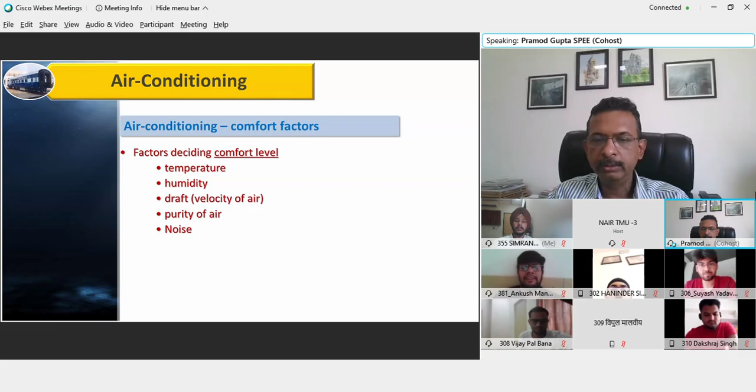There are 2 important criteria which decide the comfort level for the passenger. The first one is the humidity, to be precise, relative humidity. And the second one is the temperature. If we have the right combination of relative humidity and temperature in an AC coach, passengers will feel comfortable. Any mismatch or imbalance in these 2 factors will cause a lot of complaints from passengers.

To make the concept more clear, I have mentioned the basic definitions of absolute humidity and relative humidity. Absolute humidity is the mass of water vapor divided by the mass of dry air, giving us the absolute humidity at a given temperature. Absolute humidity is expressed as gram per meter cube.

Hotter the air is, the more water it contains. This is the first principle when we design the air-conditioned environment. When the air is hot, the amount of water vapor already present in the air is less, and therefore we can add more water to it. We can saturate it further. So in case the outside temperature is high, we can presume that the water content is less in the air.

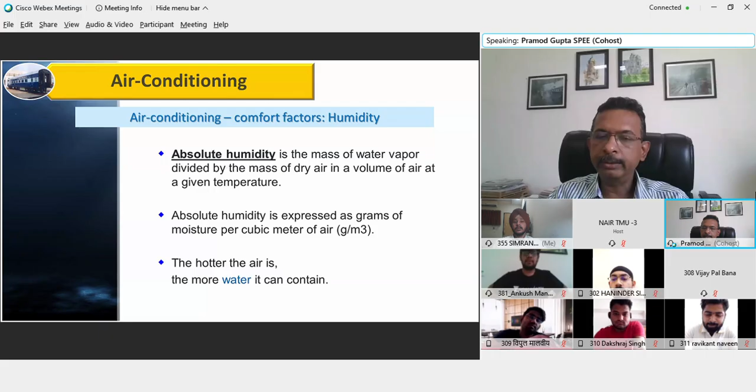The factor which is important for air conditioning is relative humidity. It is nothing but a ratio, a unitless ratio, which is the ratio of current absolute humidity to the highest possible absolute humidity in the environment, and it depends on the current air temperature. 100% relative humidity means air is totally saturated with water vapor and no more water can be accommodated. When we arrive at such a situation, the relative humidity becomes 100%.

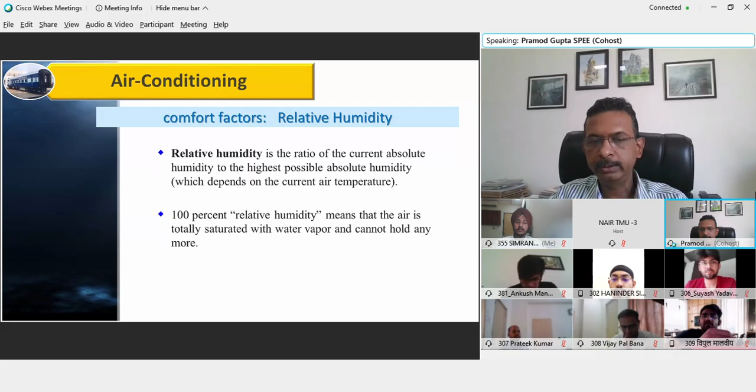Why is relative humidity important for an AC coach? I'm trying to explain using 2 examples. If the relative humidity is low, we feel much cooler than the actual temperature because our sweat evaporates easily, cooling us off. This is the basic phenomenon which takes place.

Suppose the air temperature is 24 degrees Celsius and the relative humidity is 0%. Then the air temperature...

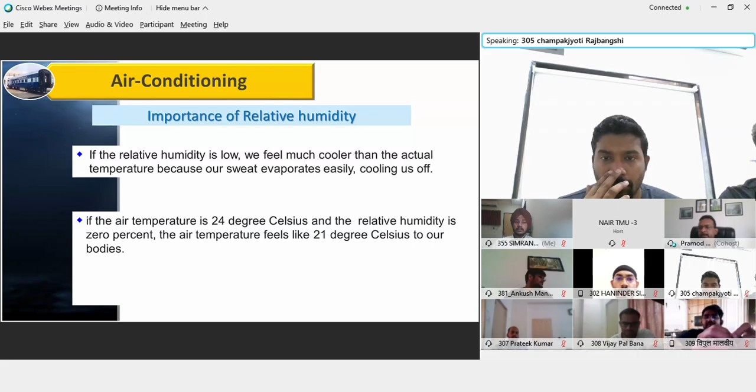Thank you. So where were we here? So if the air temperature is say 24 degrees Celsius and relative humidity is 0%, then our body feels as if the air temperature is 21 degrees centigrade. On the other side, if the air temperature is the same at 24 degrees centigrade and the relative humidity is 100%, then we feel as if the temperature in the environment is 27 degrees centigrade.

So just by manipulating the relative humidity in a coach, we can change the perception of the passengers traveling with us. There are 2 ways of controlling it: we control the relative humidity and we also control the temperature, and we try to make a balance between these 2 vital parameters to provide a comfortable environment in a coach.

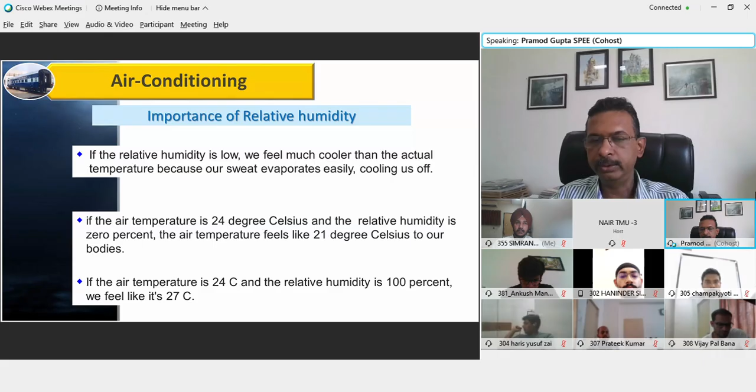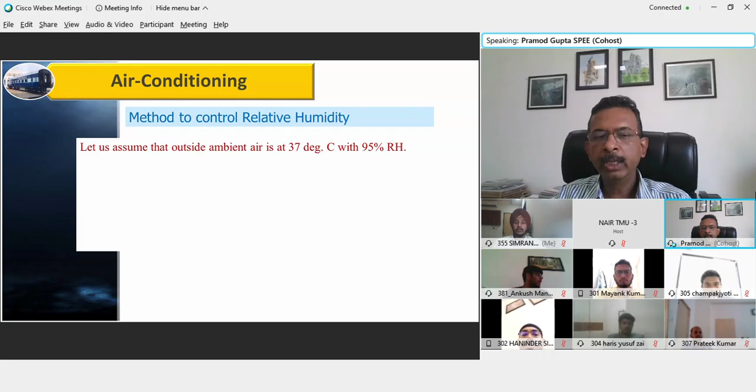Now this is the overall system, how relative humidity is controlled by any air conditioning system. It may be a stationary air conditioning system, or an air conditioning system that we have in a moving train. Suppose the outside ambient air is 37 degrees centigrade with 95% relative humidity. If that is the condition in which an AC coach is supposed to travel, we send this air over an evaporator at 4 degrees centigrade.

When we reduce the temperature from 37 degrees centigrade to 4 degrees centigrade, the capacity to hold water gets reduced. As I have already told, hotter the air, more water can be accommodated in the air. The moment I reduce the temperature, the capacity to hold water also gets reduced, and the excess water comes out of the air in the form of moisture, which can be removed from the entire system. Once I have removed the overall water content from the air, we again raise the temperature.

When we raise the temperature, the relative humidity again becomes lower, and now the overall air has less moisture compared to what it had at 37 degrees centigrade. This is a hypothetical example where from 37 degrees centigrade with 95% relative humidity, I have brought it to 21 degrees centigrade with 50% relative humidity. This cycle keeps repeating to ensure the relative humidity remains under control.

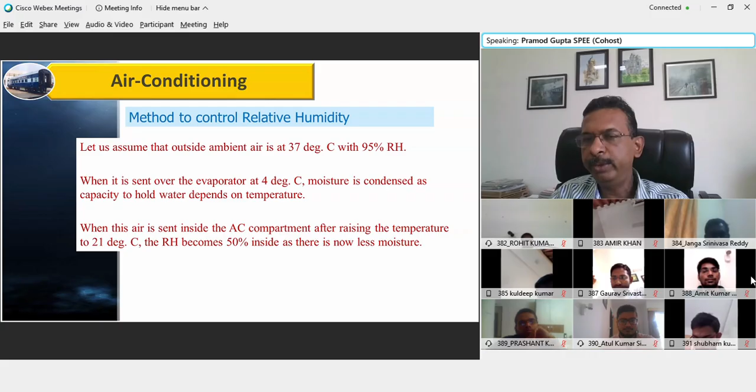As per the design issued by RDSO, the maximum permissible relative humidity in an AC coach is 60%. It cannot go beyond 60%, because most human beings feel uncomfortable if the moisture level or relative humidity goes beyond 60%.

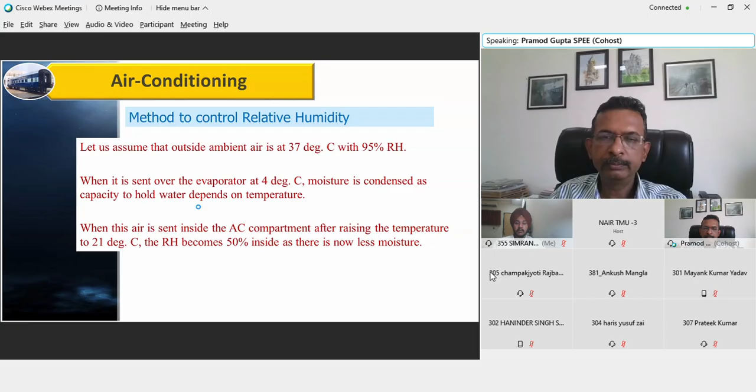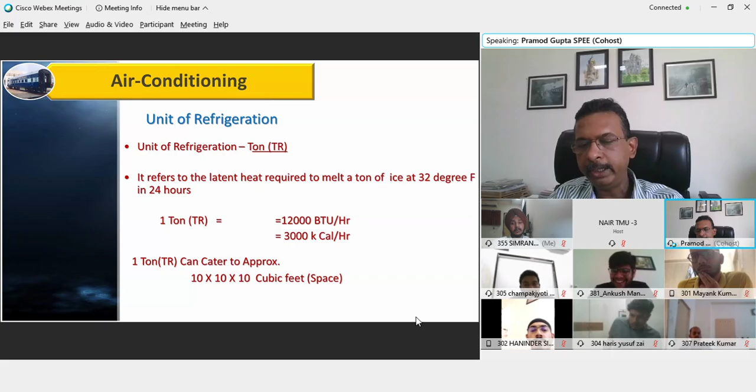The unit of refrigeration, all of us know about it, so I will quickly go through it. One ton of refrigeration is equivalent to 3000 kilocalories per hour. Whenever we want to calculate the capacity of a system, we use this empirical formula: one ton will be required to cool and keep an area of 10 by 10 by 10 cubic feet at the comfort level. So whenever electrical power people design a system, they use this formula to decide the total tonnage required for the AC equipment.

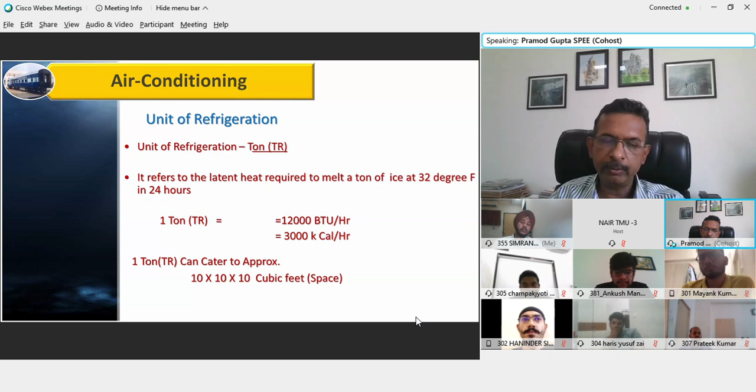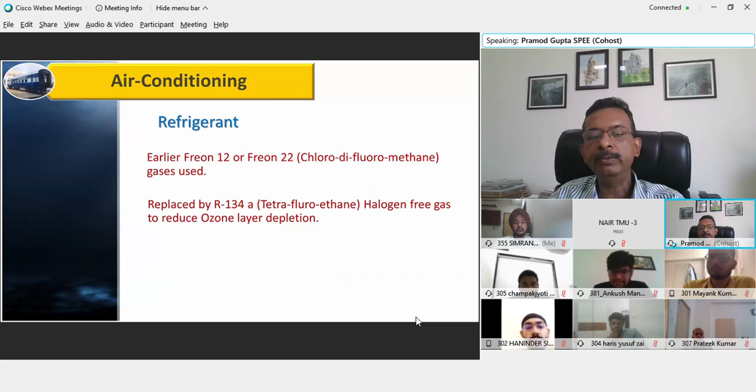When we started air conditioning in AC coaches, we started with Freon 12. When production of Freon 12 stopped due to environmental concerns, we moved on to Freon 22. Later, Freon 22 was also banned, from sale in the open market, and supply to railways was also stopped. So we moved on from Freon 22 to R134A, which is a halogen-free gas and does not affect the ozone layer. This is an environmentally friendly refrigerant gas, now used in AC coaches all over India.

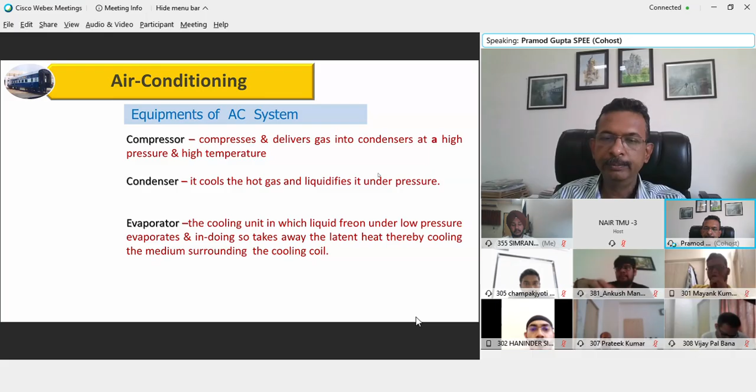When we see the refrigeration cycle, the condenser is the component that cools the hot gas and liquefies it under pressure. The evaporator is a unit in which liquid freon under low pressure evaporates, and in evaporating, it takes away the latent heat available in the air, thereby cooling the medium surrounding the cooling coil. So the principle of air conditioning, which I explained earlier, is performed by these three different components provided in an AC coach. This is the entire refrigeration cycle that we see in the coach.

Another important component in the AC coach is the expansion valve. The expansion valve controls and regulates the rate of flow of liquid freon under high pressure, depending upon the requirement of switching the AC plant on and off, and depending upon the temperature variation that has to be maintained. The amount of refrigerant is controlled by the expansion valve, and only the appropriate amount is allowed to pass or circulate in the system.

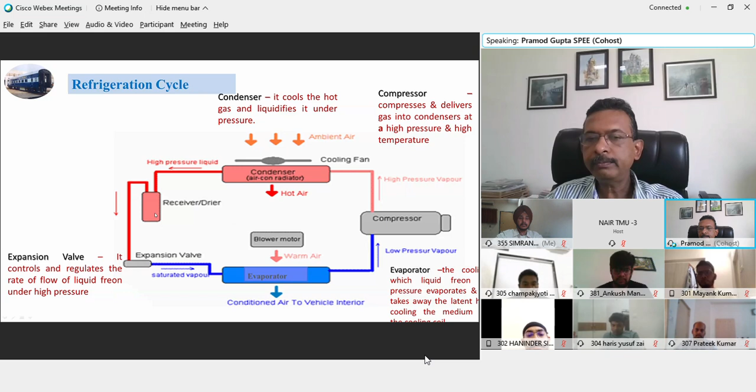There were many issues when we started the air conditioning, and the number of failures was also high. The first and foremost requirement is very high reliability standards. When passengers are traveling, we have no other source of air conditioning the coach if there is a failure in the air conditioning plants. Since the AC coaches are sealed, we don't allow outside air to flow into the coach. In case the air conditioners are not working, it will be unbearable for the passengers.

So reliability is very important. The AC plants are supposed to remain in working condition throughout the journey. The journey may be more than a day's journey. There are long distance trains which run for more than 36 to 38 hours to reach the destinations. So it is important that the reliability is very good.

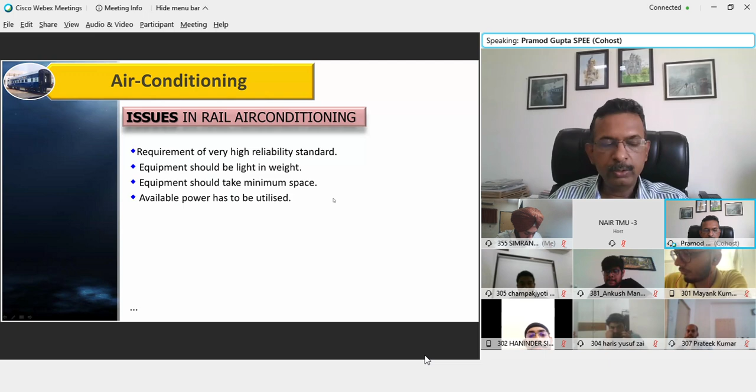Secondly, the equipment should be light in weight because any additional weight is going to add to the tare weight of the coach. The equipment should take minimum space because if I want more space for air conditioned equipment, I shall have to compromise on the space available for the passengers. Therefore, we have to design the equipment optimally, considering the overall efficiency of the system, so that we can fit all the equipment into the bare minimum space available in a coach.

The available power being generated by the DG set or by the self-generating coach has to be utilized. So the air conditioned equipment should be designed in such a manner that it should not require any other type of voltage or current.

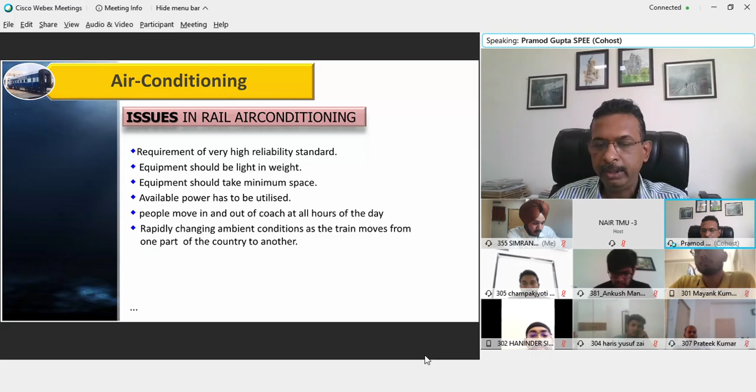The fifth important design criteria is that we have no control on the passengers regarding their movement in and out of the coach during the entire journey. Many people keep moving in and out, and many stand at the door even after opening it so they can talk to people and enjoy the cool air in the coach. All such movement in and out amounts to excess leakage of the air conditioned air. Whenever there is leakage, the temperature becomes high and the load on the air conditioning equipment also becomes very high. So whenever we design a system for an air conditioned coach, a certain percentage of leakage is taken into account because of the continuous movement of people in and out of the coach.

The rapidly changing ambient conditions also make the working of air conditioners difficult. During the winter season, we have extreme cold conditions in the north, where the temperature can be 0 degrees or below 0 degrees centigrade, with relative humidity very near 100%.

The moment the train moves from the northern part of the country to the southern part, where weather conditions are good, we have to switch the air conditioned plant into cooling mode. Whereas during the same journey, when the train was moving in the northern part of the country, we had to switch on the heating arrangement of the AC plant. So with changing ambient conditions as per the geography and territory in which the train is moving, the requirement of conditioning the air keeps on changing, and the plant should be able to take care of it without manual intervention.

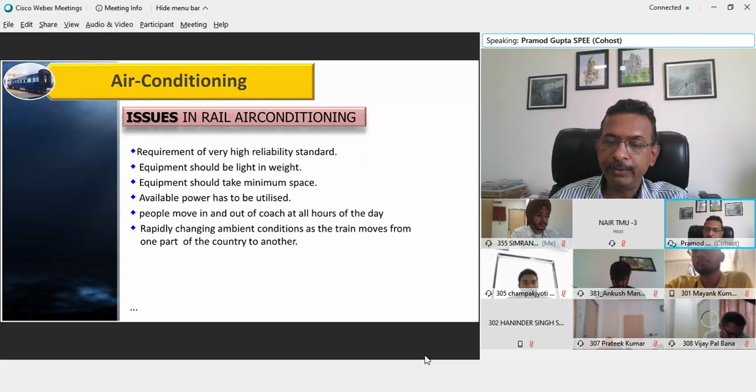Excessive vibrations are another issue creating problems. Initially when air conditioners were designed, they were designed for stationary equipment, because the components in an air conditioned unit are connected using copper tubes which are brazed to each other. Vibration makes life complicated for these copper tubes and brazing joints, because it may cause cracks to develop in the pipeline. As a result, the refrigerant gas may escape into the air and the AC plant may stop working.

The dusty atmosphere impairs the exchange of heat from the AC plant to the environment. If all the equipment is dusty, the heat exchange will be low and the efficiency of the AC plant will also be low.

The safety of passengers is also important, because the AC equipment works at 400 volts, and the rules and regulations of the Indian Electricity Act are also applicable on air conditioned coaches. We have to design the system so that people don't come in contact with live wires and don't get electrical shocks, and we also have to ensure the air conditioned equipment does not catch fire during a run. All safety related norms that are supposed to be maintained are maintained by the maintenance staff during maintenance of coaches in the coaching depot.

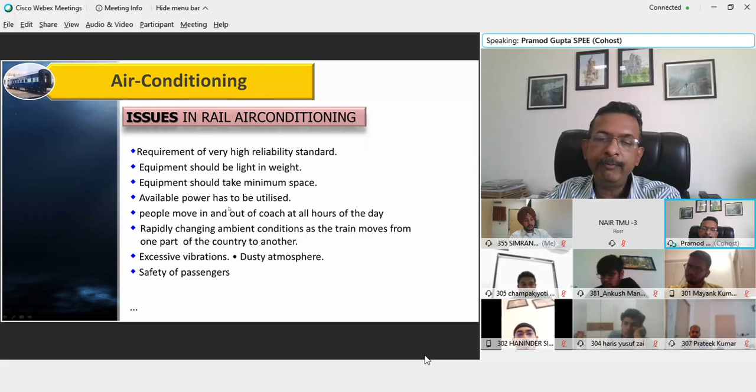So these are some of the important issues which we face when we design the air conditioned equipment for the coach and when we maintain the coaches in the coaching depots.

These are the design parameters, which I have picked up from the RDSO manual: to supply clean, fresh air at a controlled, uniform temperature.

We have to cater to the continuously changing number of passengers. There is a possibility that only 2 or 5 people are traveling in a coach, and there is also a possibility that the coach is overcrowded, which happens during the festival season and summer break, when more than the permissible number of passengers, along with heavy baggage and luggage, travel in AC coaches. So the air conditioned plant should be designed to take care of these extreme situations as well, along with heating and cooling, as I have already explained.

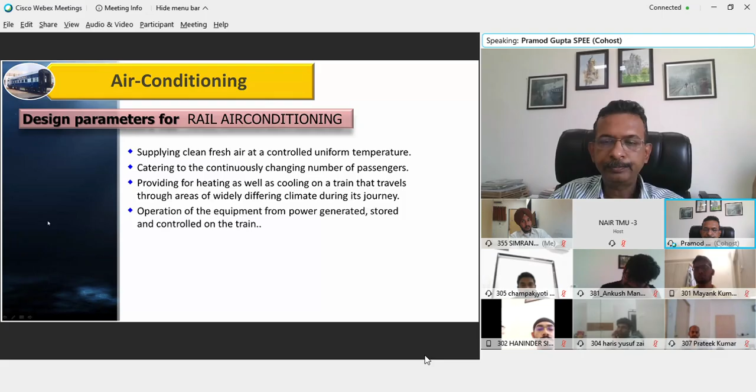These are the different temperature settings which we have provided in the coach. Earlier there were 3 different settings, and we could change them as per the requirement or request of the passengers traveling in the coach. Entertaining these requests was creating a lot of problems for the staff, and when technology improved and we found the most comfortable range for passengers, we decided to do away with the 3 ranges and go ahead with a single range of temperature settings in the AC coach.

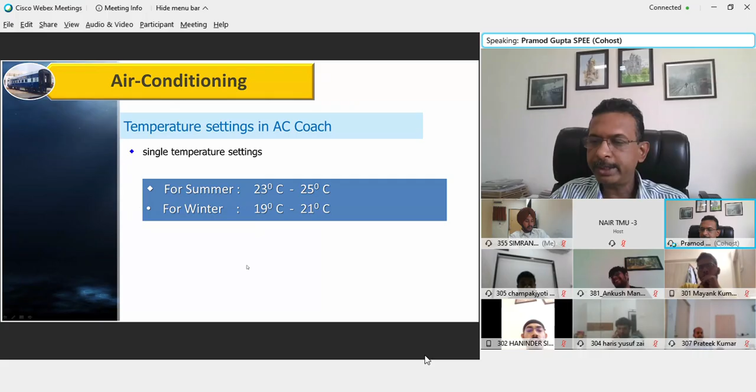During the summer, the temperature is set between 23 to 25 degrees, and for winter, it is between 19 to 21 degrees centigrade.

We have a cut-in and cut-out kind of arrangement which maintains the temperature within these specified ranges. The temperature settings are also displayed in the AC coach to keep passengers informed and to reduce passenger complaints.

This was not done earlier. We were not very open about the temperature provided in the coach, and passengers used to complain that the cooling or heating was not adequate, and a lot of unpleasant situations were created in the past because of heated discussions between the AC coach attendant and the passengers.

In order to avoid passenger complaints and to make things more transparent, we have started providing these stickers on both sides of the coaches, on the AC coach panel itself, so that passengers are now aware of what to expect. In case there is any requirement beyond this range, it is not possible to entertain their request.

Number of complaints have reduced, although we still encounter some passengers who complain that these temperature ranges are not comfortable to them. There are passengers who insist that during summer, the temperature should be kept as low as 19 degrees centigrade. We receive all kinds of requests, but it is not possible to entertain them because we have to maintain a temperature comfortable to most passengers. These settings have been worked out after doing some study.

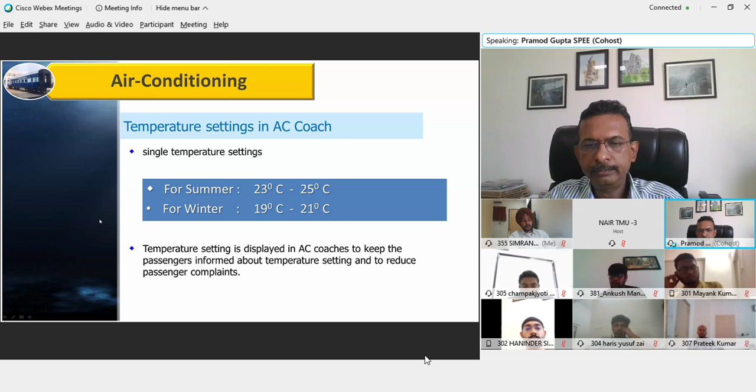Depending upon the number of passengers traveling in the AC coach, the requirement of AC load is calculated, and according to that, the capacity of AC plants is decided. We do the calculation first, arrive at the total AC load considering change in weather, leakage of air conditioned air, and other parameters, and arrive at the optimal requirement for AC load of the coach, assuming the entire coach is full. So we design it considering that every seat is occupied.

In AC first class, the requirement is 5.3 ton, and we have provided only one plant with a capacity of 6.7 ton. In AC2 tier, the requirement is 7.48 ton, and we have provided two plants, each with a capacity of 5.2 ton. So, in case even one plant is not working, I am left with the capacity of 5.2 ton, and with that I have to take care of the AC load requirement of 7.48 ton.

There are situations when one AC plant is not in working condition. In that case, half of the capacity is not there, and the entire coach is attempted to be kept in an air conditioned environment using a single plant. Under these circumstances, the AC coach attendant becomes very careful. He tries to control the movement of passengers and remains alert that excess passengers should not travel in the coach. He takes certain written and unwritten measures to ensure there is no passenger complaint and the coach can work up to the destination.

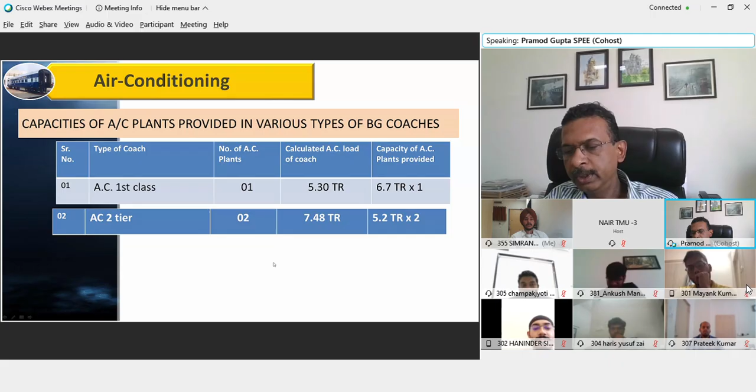Is it similar to regular AC coach? Yes, it is similar to the regular AC coach. The Palace on Wheels train is maintained by Ajmer Workshop. The Maharaja train, which is operated by IRCTC, is also maintained by the Ajmer Workshop. Ajmer Workshop is the nodal agency for maintaining the AC plant for Palace on Wheels.

I have done the maintenance on Palace on Wheels for 2 years when I was posted as a Deputy CWE at Ajmer Workshop, during the years 2004 to 2006.

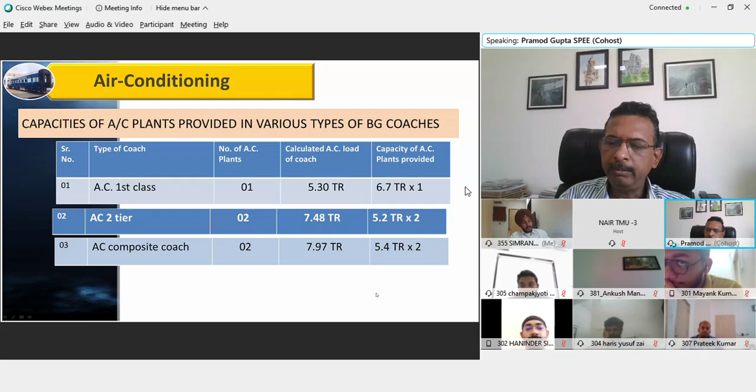The AC composite coach has 2 plants of 5.4 ton capacity each. Also, regarding Palace on Wheels, let me share one more piece of information: there is no railway employee who accompanies the train. It is managed by the Rajasthan Tourism Department, and even the tickets are issued by them. They only do the ticket checking in case it is required, although it's a premium train.

As on date, as per the prevailing rate, the per passenger ticket for one night is somewhere around 1 lakh rupees per person. That is the rate for the ticket per person per night, and they also take care of all the hospitality and everything. They only allow one supervisor to accompany the train, with strict instructions that the supervisor or staff cannot move in the coaches at their own will. Only if allowed to move in an AC coach, he comes to see the working of the AC; otherwise, he remains at the designated place in the train itself.

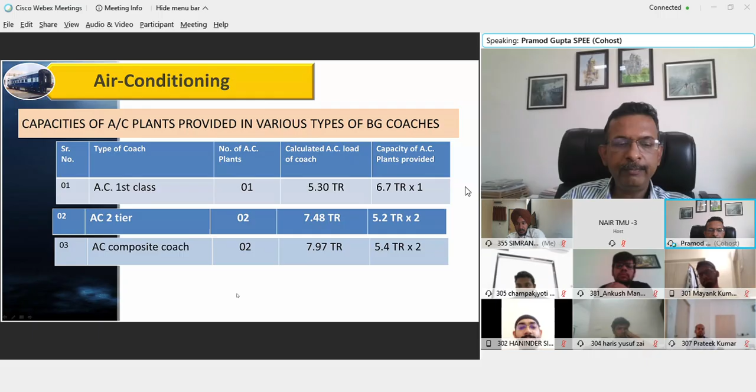The AC composite coach has more passengers, so the requirement is more, and the capacity of the plant is also high. We have the highest requirement in AC 3 tier, and accordingly the capacity of the plant is also high. So these are the different requirements of AC coaches and their capacities in the AC coach.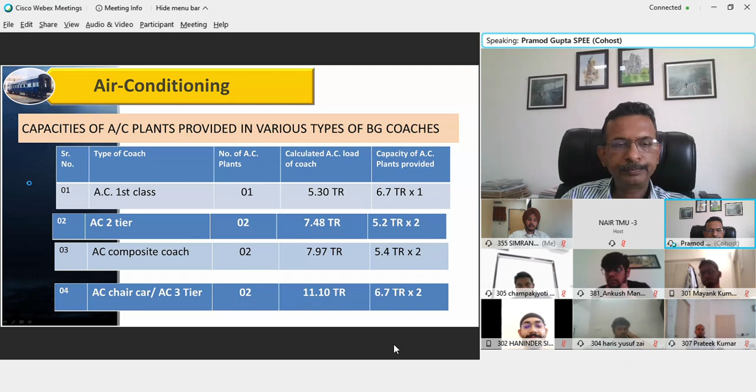There are two systems for the generation of air conditioning requirement into the coach. The first one is the self-generating AC coach, and the other one is the EOG AC coach. So we have two different modes of generation of electricity for smooth operation of the AC plant in an AC coach.

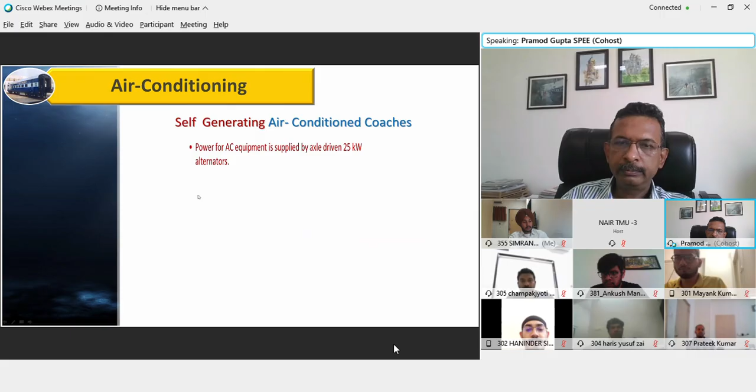The self-generating air conditioned coach is similar to what we have seen in the train lighting coach. The only difference is that the ratings of the equipment are different, and the size of the equipment is different. The power required in a self-generating AC coach is provided by a 25 kilowatt alternator, connected through the axle pulley. At low speed and halts, the power requirement is met using a 110 volt lead acid battery, mounted in the underframe of the coach. So these are the two arrangements through which we provide electricity to the AC plant.

The other one is the EOG kind of arrangement. I explained a little bit about DG sets and power cars when we took the session on train lighting equipment. The output supply is 750 volt three phase, which comes from the power car, and this is fed to the coach using one of the feeders. The AC equipment operates at 415 volt three phase, so we have to provide a 150 kVA transformer in each coach to step down the voltage from 750 volt to 415 volt. Then the lights and fans operate at a different voltage.

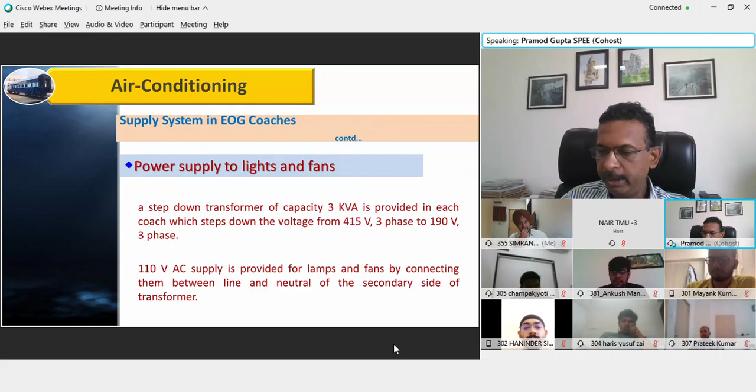Lights and fans operate at 110 volt single phase, so I need another transformer. The capacity of this transformer is 3 kVA. We do a second stage of stepping down the voltage, from 415 volt to 190 volt three phase, and we connect the lamps and fans between one of the lines and the neutral, so as to achieve 110 volt AC supply required for lights and fans. So there are two levels of stepping down the voltage made available from the power car.

We have another provision only for lighting the emergency lights. We have one battery provided in the coach, connected to a few emergency lights, which becomes operational only during emergency. The emergency mostly occurs when the coach gets derailed. Suppose one coach is derailed, and if it's an EOG kind of arrangement, the entire couplers get disconnected, so we have no source of supply for the air conditioning equipment and train lighting equipment for the coach.

The other option can be that the coach is derailed and stationary. If it's a self-generating coach, there is no generation from the alternator because the wheel is not moving. And even if the battery gets disconnected from the circuit, the battery backup is also not there for the regular supply, leave alone the plant - we don't even have the regular power supply for train lights and fans.

During such a situation, the battery takes over. It has sufficient capacity - 24 volt, 90 ampere hour - and this battery is used to provide emergency lights so that the coach does not become dark, and it remains active till the rescue operation starts. So this is the only function for which the battery is provided, to supply emergency lights in the coaches.

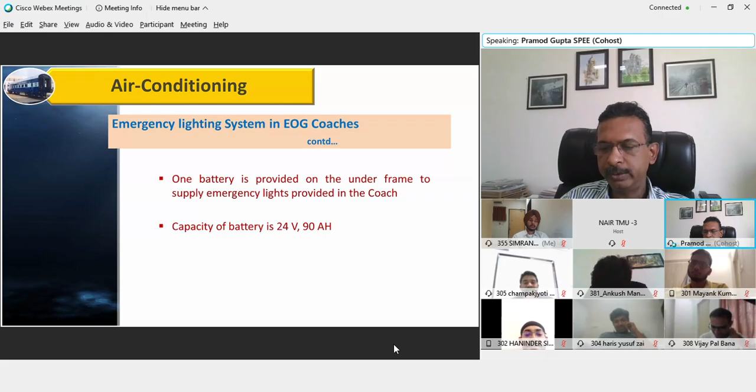There is a requirement as per the guidelines that... Gautam, please mute your mic.

There is a requirement that before we allow passengers to board the train, the AC coach should be air conditioned. Now I have two or three different methods to air condition the coach. The first one is that I can use the stored energy in the battery if it's a self-generating coach. It is the worst kind of idea to consume the stored battery energy, because that stored energy is meant to take care of emergencies or the power requirement during halt. So if I consume that energy, there may be a problem during the run.

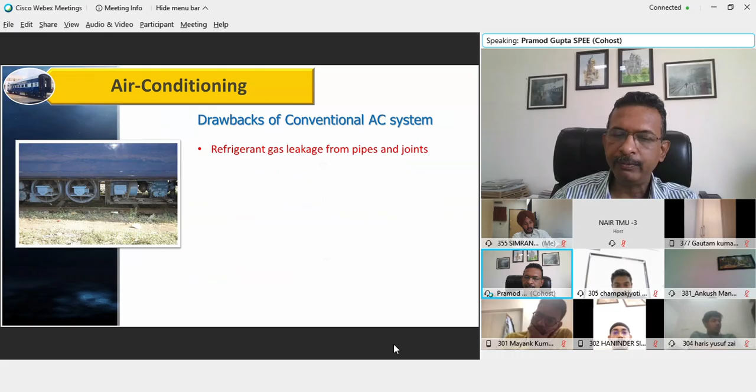There is a possibility that an external body, some ballast or foreign object, may touch or hit the refrigerant gas system and develop cracks, leading to leakage of the refrigerant gas.

The second disadvantage was the high weight of the AC equipment, contributing to the overall coach tare weight. Then there's large space occupation, as you can see in this photograph of one plant, and a similar situation here - the entire space is occupied by the AC plant.

There is a maintenance problem for the underslung equipment. Suppose the rake is placed at the platform, and the staff accompanying it finds a small problem affecting the overall efficiency of the coach that could be attended to - he cannot do it because he cannot access the air conditioning plant by going under the coach. There is no space for him to go under, and it is highly unsafe to allow staff to work in such a risky environment. Thirdly, he can neither sit nor stand under the coach, so practically he cannot do any work. So even if the trouble is identified and manageable before departure, we allow the train to run with that small trouble left unattended.

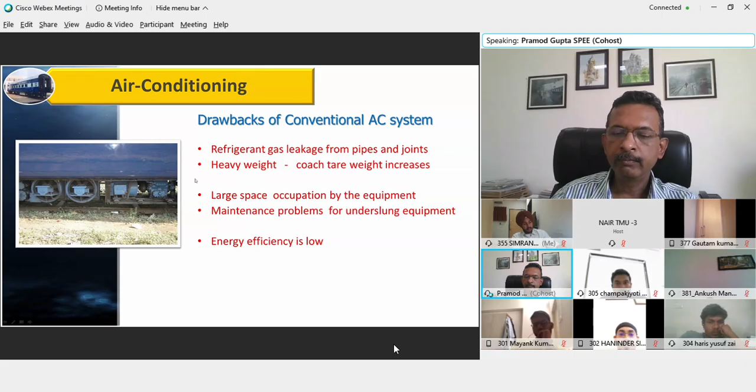So these are some of the disadvantages that we had in the conventional AC coach. In case I ask a question in the exam about the advantages of RMPU coach or the disadvantages of conventional AC coach, your answer will be on similar lines. You have to write on the similar line.

In case I ask for the refrigeration cycle, you should be able to draw it. In case I ask you to mention the function of the components, you only have to write the name of the equipment and its function — you need not draw the refrigeration cycle. So read the questions carefully and answer accordingly, whatever question comes for you in the exam we are going to have next Friday.

Did I explain the overall structure of the question paper to this group? Can somebody say? No, sir. No. Okay, I think I have explained it to the earlier group.

The exam will be for 35 minutes as usual for the other subjects. There will be questions of 20 marks in the objective part — approximately 20 marks — with multiple choice questions, yes/no type questions, and a few fill in the blanks type questions.

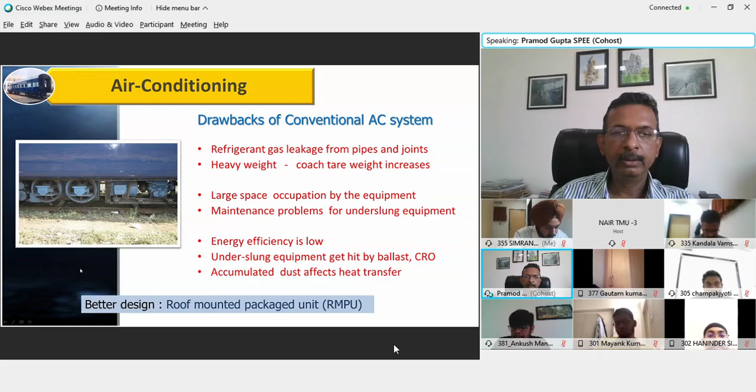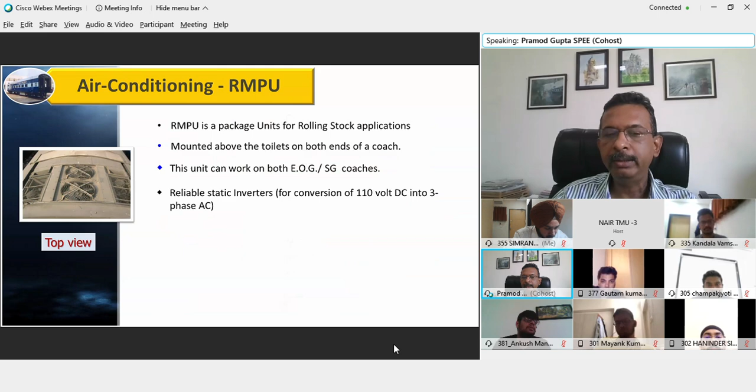Let's come back to the subject. We have moved from the underslung AC coach to the RMPU type of AC coach. It was designed in 1992 especially for the rolling stock purpose, and it is mounted above the toilet on both ends of the coach. It can work on EOG and SG, and we are using reliable static inverters for conversion of 110 volt DC into three-phase AC.

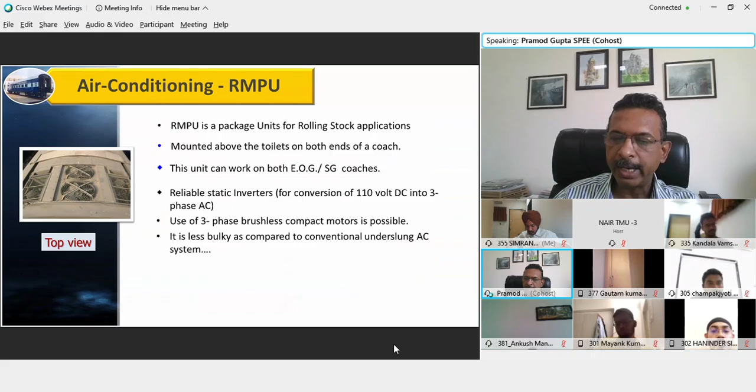We use a three-phase brushless compact motor. It is less bulky as compared to the conventional AC coach.

Initially, when we introduced the RMPU, it was 5.2 ton capacity, which was considered inadequate for the AC2 tier system, because when we designed these RMPU units, we somehow undercalculated the leakage of air which can take place due to movement of the passenger. That was a parameter which was not taken into account properly, because it was not anticipated that the movement could be as high as it was. So there were some complaints in the coaches, and it was considered not adequate. We revised the specification, and later on the capacity was enhanced. Now these are the different capacities which are being made available in the AC coaches.

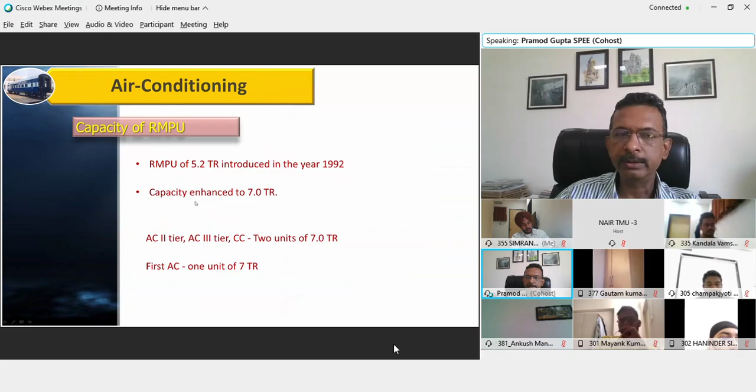This is how the RMPU unit looks like. We have the condenser fan and the condenser motors, then the sealed compressor. Each plant has two sealed compressors, and as I said, each sealed compressor works independently. We have the thermostat, which is provided in the return air path, and we also have the heating element. These are some of the photographs which show you the inside of the RMPU unit.

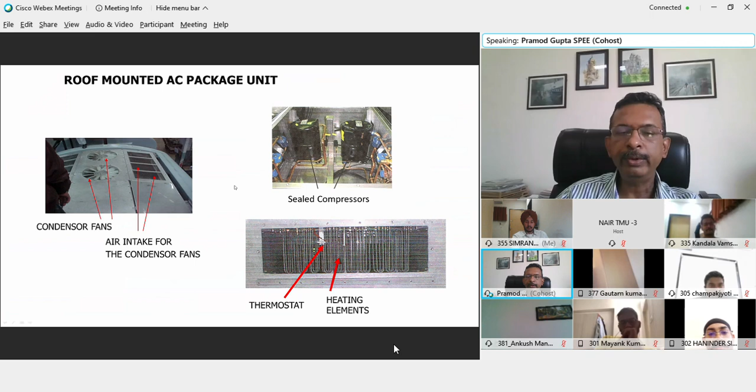This is a requirement as per the specifications. In the first AC coach, the requirement is that we should have the fresh air inside the coach at the rate of 0.7 meter cube per minute per passenger. Another requirement is that we should have two independent circuits, and each independent circuit should be able to work independently. So we have two compressors, two condensers, and two cooling coil cum heaters.

Each RMPU should be able to work with one condenser fan and cooling capacity so as to obtain not less than 75% of the rated capacity. This is the requirement, and the designs are approved only after these parameters and other parameters are met by the manufacturer of the RMPU unit.

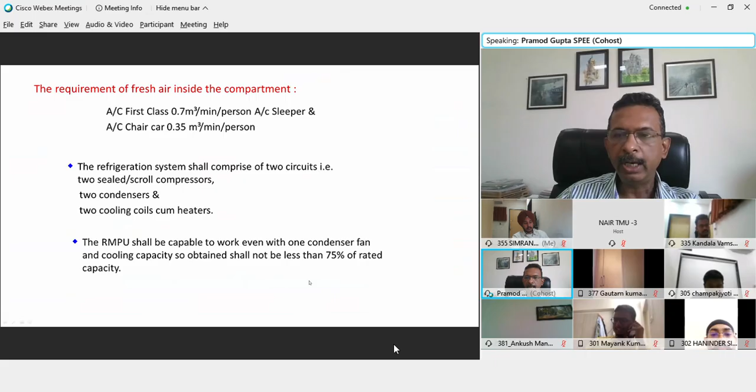This is a comparison just for a quick glance. You can see the weight is much less as compared to conventional AC. The amount of refrigerant which has to be charged is also less. I need only 3 kg of refrigerant gas as compared to 15 kg in the conventional AC.

The downtime for repair is also less. We simply remove the entire RMPU unit and replace it by providing a new RMPU unit, whereas in case something is wrong in the conventional AC equipment, I have to remove only one component: unbrace the copper tubing, remove the equipment, provide the equipment, and rebrace the pipeline.

Then carry out the test to check whether there is any leakage in the system or not. That test itself takes more than 4 hours because we charge it at a particular pressure, and after a certain period of time, we check what is the pressure in the pipeline. So repairing the conventional AC system is much more complicated as compared to the RMPU, which is an enclosed kind of system, a plug-in plug-out kind of system. In case there is any problem in the RMPU unit, we simply remove the entire RMPU unit using the crane and replace it with healthy equipment. Then later on, we carry out the repair work on the RMPU, which is available now on the shop floor.

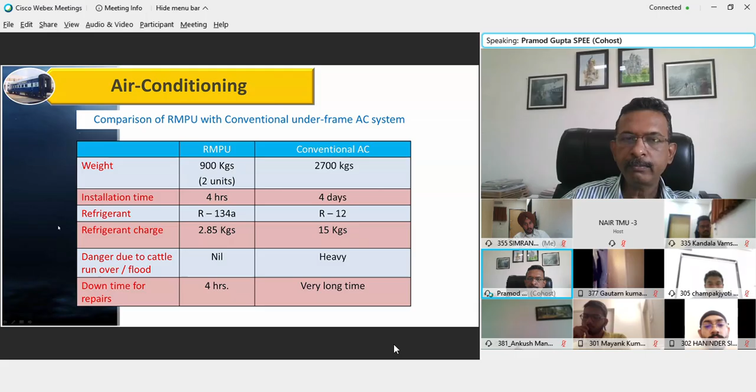The battery capacities are also different depending upon the type of the coach and the requirement. AC 2-tier, 3-tier, and composite coaches have an 800 ampere battery, while AC first class has one set of 525 ampere hour.

Now we will move on to the loco. I will explain some of the portion related to maintenance of electric locomotive. We will cover some slides today, and the balance leftover slides we will take in the subsequent classes.

This is the organization structure that we have for the electric locomotive. At headquarter level, we have PCEE and his team. And in loco sheds, we have senior D loco shed, senior DEE traction, rolling stock DEE, and ADEE. So this is the organization structure up to the division level, up to the zonal level.

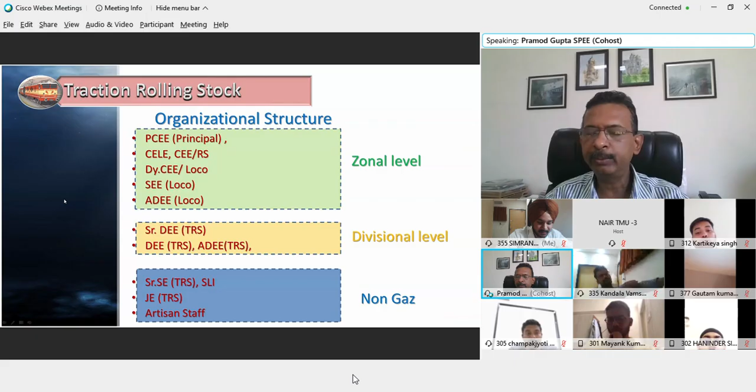Here are certain advantages of electric traction. We can utilize electricity, which can be generated from a variety of sources. It can be a fossil fuel generating system, or it can be a renewable source of energy. There is no pollution at site, although there is pollution when we generate electricity using coal.

Coal-based thermal plants produce harmful greenhouse gases, and in India, 70% of the energy we generate is being produced using coal-based power plants. Now we have decided, because people have become more environment conscious, and we also have commitments at international forums, that we should try to reduce the use of coal-based power plants. As a policy, it has been decided that no new coal-based power plants will be commissioned in India in future.

We have faster acceleration and braking, resulting in better running time. This is because of the design and the control mechanism available to the pilot, so he can accelerate the train fast as a large amount of energy can be pumped into the traction system, and braking is also smooth. Then we have reduced dependence on petroleum products because we are not using high-speed diesel.

There is a reduced noise level because the operation is smooth, and we don't have DG sets. High speed of the train is possible because the overall capacity, or overall horsepower, or the tractive effort available in an electric locomotive, is more.

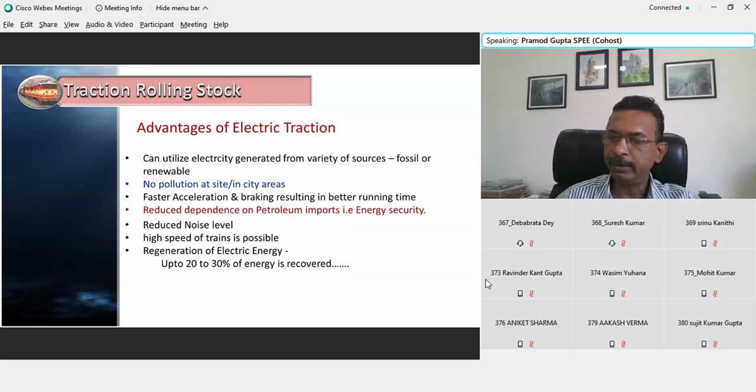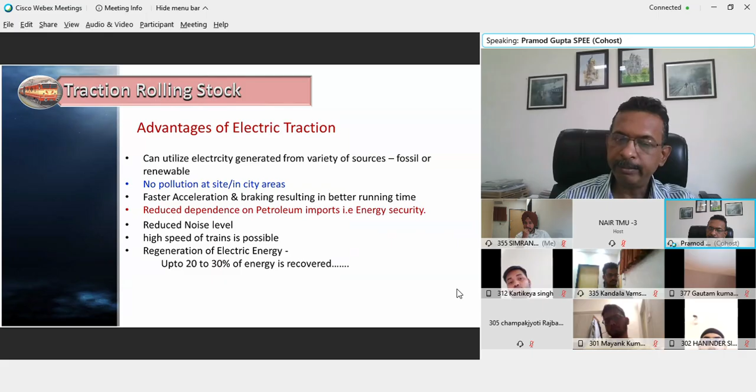The produced electricity, since it is not required for the locomotive, can be used by another electric locomotive in the same feeding zone, or it can be returned back to the distribution company. We have a net metering arrangement with the distribution company, and we pay the bill for the net amount of energy consumed in Indian Railway. So rather than wasting energy as friction or heat when brake binding takes place between the brake block and the wheel, we convert that energy into usable energy, returning it back and saving on electricity.

We have a large number of locomotives in service, and in order to identify each locomotive easily by everyone across the railway, we assign a unique number so that it can be traced and it is easy to communicate about. We have a 10-digit alphanumeric series which identifies the locomotive uniquely to everybody in railways.

The first letter indicates the gauge for which the loco is designed. If it is W, it is broad gauge. The second letter indicates the traction type. If it is A, it is AC traction; if it is D, it is diesel traction; if it is C, it is DC traction, or we have dual traction, AC-DC. The third letter is the type of service for which the loco is designed. If primarily designed for passenger service, it is P; if for goods, it is G.

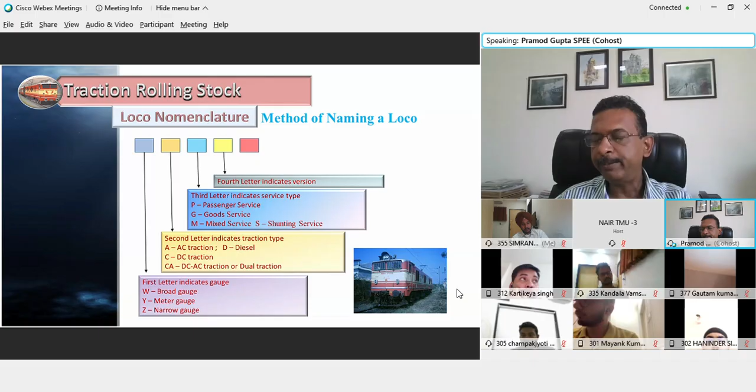The fourth letter indicates the version or type of technology used to design the locomotive. The fifth letter indicates the modification. Suppose I'm using the same technology, and within that technology I carry out a major change where a new version is not warranted, then I indicate it by the fifth letter.

If we see it like the operating system on a computer, the fourth letter is like having Windows 8 and Windows 10 - that corresponds to the fourth letter for the electric locomotive. If I have Windows 8.1, then Windows 8.2, the operating system remained version 8, but there were major modifications, which is why 8.1 and 8.2 were released. Similarly, for the locomotive, if we keep the overall architecture, control system, and traction system intact, but still carry out a major modification, we assign a different number.

For example, earlier we were using TAO kind of traction motors. Later, Hitachi developed a superior DC traction motor, so we replaced the TAO traction motor with Hitachi motors. The rest of the loco remained as it is, so the overall design and capacity did not change. We did not introduce a new version, but assigned a fifth letter, and those locos were identified with the letter H, meaning these locomotives have Hitachi motors provided in them.

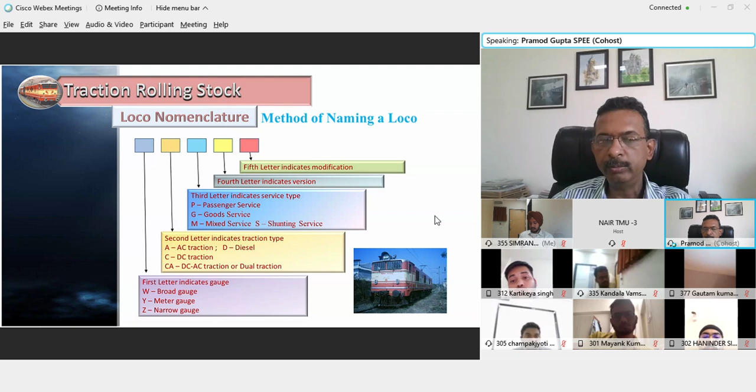For example, this is how a loco is named. WAP5 means broad gauge passenger service. WCAM2 means broad gauge dual mode loco, mixed service, version 2. WAG9 means broad gauge locomotive designed for AC traction and goods service, version 9. This is how a loco is named, and either these 4 or 5 digits are followed by another unique 5-digit number. If we combine all these numbers with the balance 5 digits, we can identify a loco uniquely.

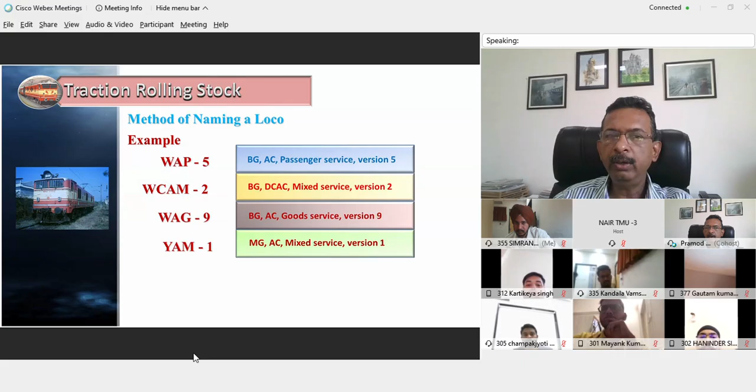We started importing locomotives from 1954 itself. The first 4 locos were imported from outside because we did not have any manufacturing capacity. CLW started production in 1961 when the first WCM5 locomotive was manufactured. We continuously improved the technology because when we started production, we received technology from both English Electric and Hitachi. We took the best features of both and introduced a new type of locomotive, starting with the WCM5. We Indians are very good at jugaad technology, so we could improvise the existing technology, do some jugaad, and come out with a new version of locomotive.

Later on, there was a requirement to have a locomotive which could work in both AC territory and DC territory, because the Mumbai area and Kolkata area were DC territories.

They were still having 1500 volt DC system, whereas the adjoining divisions started having electrification with 25 kV AC system. So in case I want to start a train in Mumbai and take it to Delhi, I need a locomotive which can work in both DC territory as well as AC territory. So we came out with another locomotive known as AC/DC locomotive, and these were the 3 important landmark locomotives which we came out with.

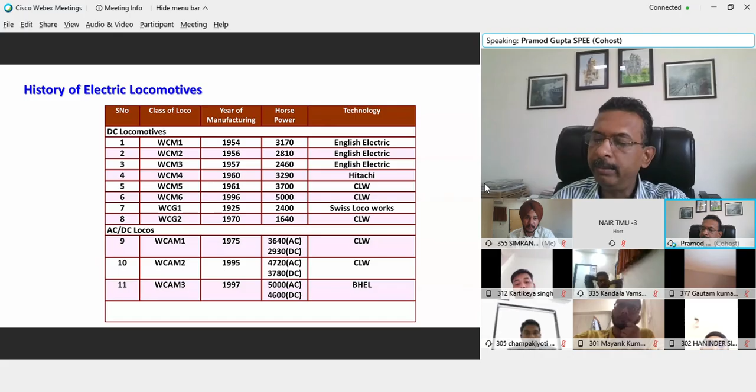The production capacity of CLW was less than the pace at which electrification was taking place, so CLW could not meet the expectation of the electrical department. So we roped in BHEL, the PSU of Government of India, and they developed the manufacturing unit and started manufacturing electric locomotives at Bhopal and Jhansi units of BHEL. They are still manufacturing locomotives for us, and they are one of the largest suppliers for components, especially traction motors which are still being manufactured by BHEL, and bogies are also being manufactured. So BHEL is continuing with the railway division in their organization.

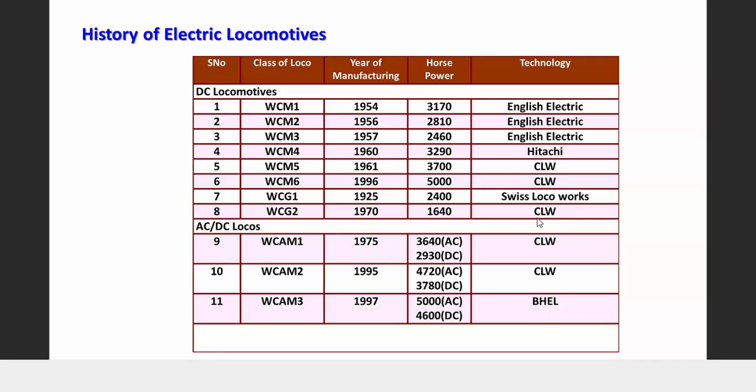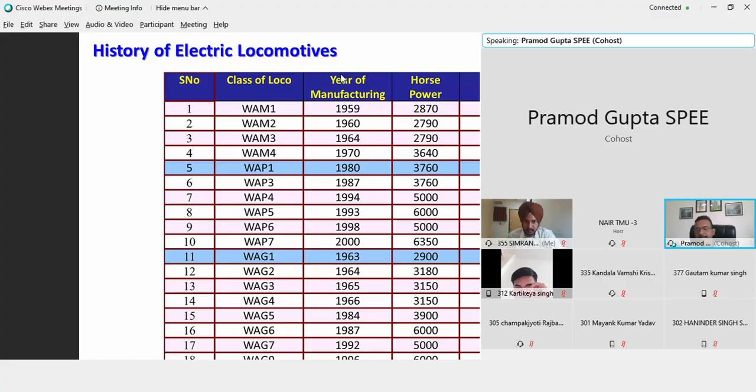Later on, we had a large number of locomotives introduced in Indian Railway. You can imagine the plight of officers posted in the loco sheds who are supposed to maintain so many types of locomotives. Although all locomotives are not based at all loco sheds, out of these 19, each loco shed will have at least 3 or 4 types of locomotives, and they have to keep their spares independently because the technologies are different, the requirements are different. The staff should also know the designs for each and every locomotive. Therefore, training becomes very important and we have to train our staff at regular intervals.

We had different locomotives, and the emphasis was to improve the horsepower. As we released a new locomotive, the common feature you can see in this table is that the newer locomotive had a better horsepower compared to the previous one. Like from WAM1 to WAM4, each locomotive, as we released a new version, was more powerful compared to the previous locomotive. Similarly, in the WAP series, WAG series, till WAG9, these are the manufacturer or the technology which has been taken under the transfer of technology we had with the original designer or manufacturer.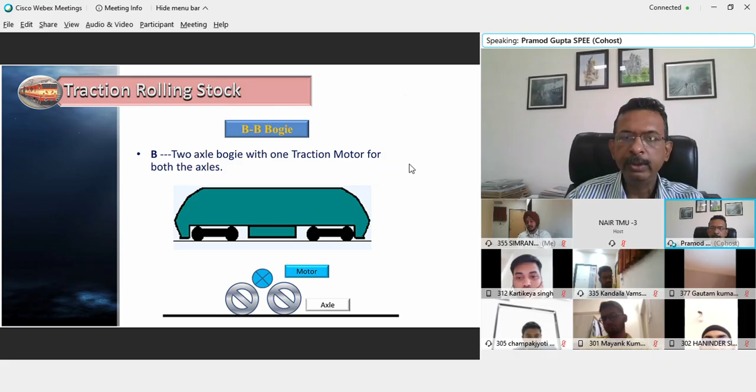Similar to the loco, we also have the bogie nomenclature. We have different designs of bogies provided in a locomotive. If we have a BB kind of bogie design, each bogie has 2 axles, and we have only one traction motor to drive both axles. So in this locomotive, we will have 4 axles and only 2 traction motors to drive the locomotive. The other design is the BO kind of system where we have 4 axles, and each axle will have 1 traction motor for its use.

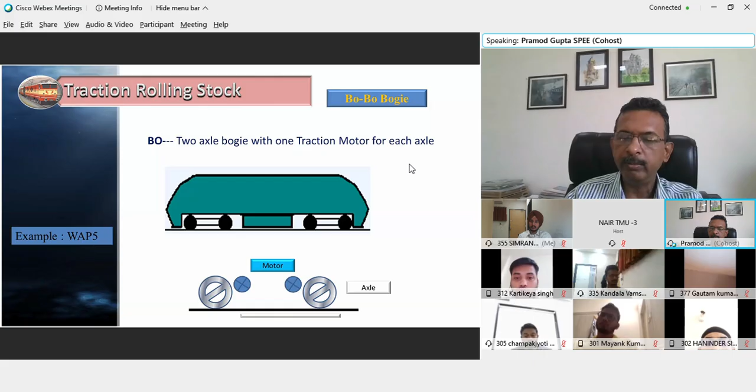The current example is WAP5. There is no other locomotive which is using BO kind of an arrangement. The locos which were having BO kind of arrangement have already been condemned and removed from service. So WAP5 is the only locomotive using this kind of bogie.

The most common bogie that we have on Indian Railway in electrical locomotives is the CO kind of bogie, where we have 6 traction motors and 6 axles. Each traction motor drives the axle independently.

It is possible for me to isolate one traction motor at a time. And even if one traction motor is isolated during run by the loco pilot, there is no loss of efficiency in the locomotive. There is no need to reduce the speed of the locomotive, and the journey can be performed. So if there is a need to isolate the traction motor, the loco pilot can easily isolate it using some of the rotary switches provided in the loco cab itself.

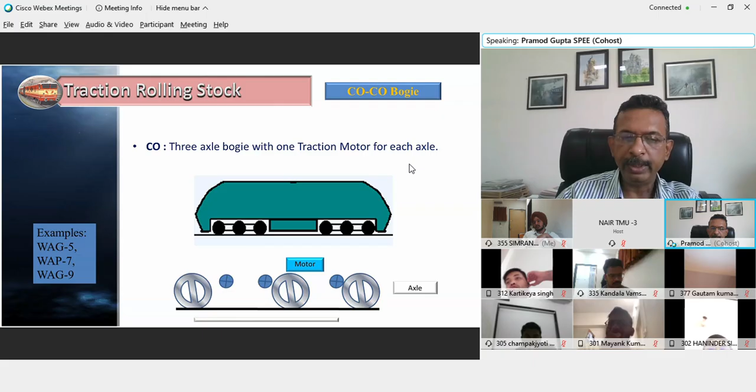This is the most common design that we have in Indian Railway. There are three locomotives which are using it: the WAG5, WAP7, and WAG9. They are all using CoCo bogies.

How the train moves: the electrical energy, when it is given to the traction motor, gets converted into kinetic energy, and that energy is provided at the wheel rims for moving the locomotive in forward or reverse direction. So that is the basic principle, the conversion of electrical energy into mechanical energy.

Why do we need the energy? We need the energy to overcome train resistance. There is friction between rail and wheel throughout the journey, and this friction is high when the train is stationary. So we have more train resistance at the start of the train.

Then when we are moving at high speed, we are cutting the air, so we again have wind resistance that we have to negotiate. Then we have to negotiate gradients without reducing speed. Curvatures are also there in the section, and we have to provide acceleration to increase speed or to make up lost time.

So there are different requirements for which we need the tractive effort, and we also need tractive effort which can be manipulated or changed as per the requirement by the loco pilot. These are the basic reasons why we need traction electric power to haul the locomotive, and these are different areas where the electrical energy gets consumed during the journey.

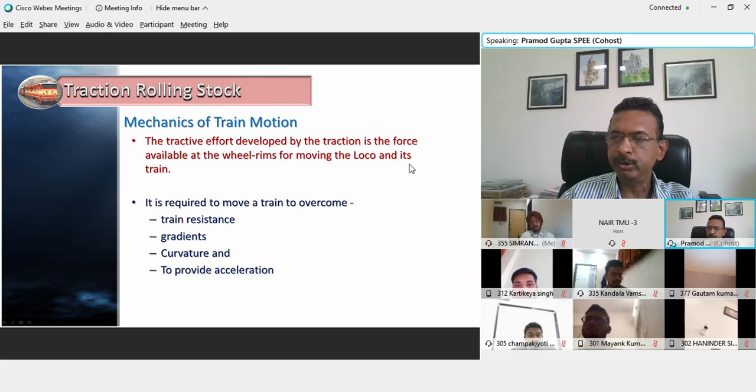What happens when the tractive effort fails to move the train forward? The tractive effort being passed on to the wheel has the function to move the wheel in the forward direction. If the tractive effort is more than the overall requirement, the loco will move forward.

Suppose, because of some reason, the train does not move in the forward direction, then the wheel starts rotating at the same location - this concept is known as wheel slipping. That means rather than the wheel moving in the forward direction, the wheel is rotating at the same location. When the wheel rotates at the same location, it continuously rubs the portion of the rail in contact with it, and the rail also gets damaged at that location.

Sometimes the track becomes unserviceable, and we have to suspend traffic on that particular track before the portion of rail is replaced by civil engineers. If the damage to the wheel is also more, a flatness develops in the wheel, and the wheel also requires a change. Since it cannot be changed in its position, we remove the locomotive and replace it with another one. So the pilot has to use all his technical knowledge to ensure there is no wheel slippage at the start of the train.

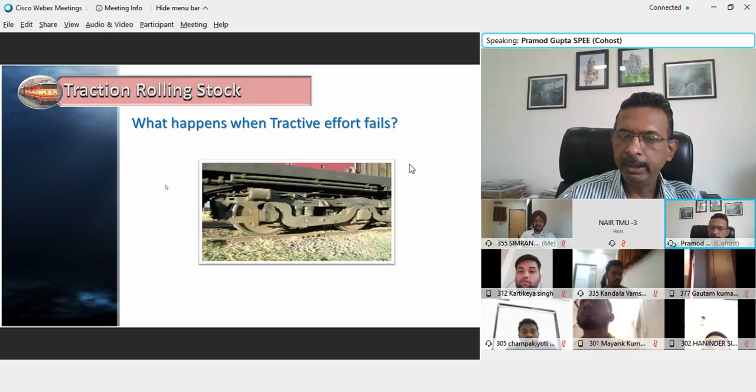Now we will stop here. We will talk about the basic components of the electric locomotive from the next session onward.